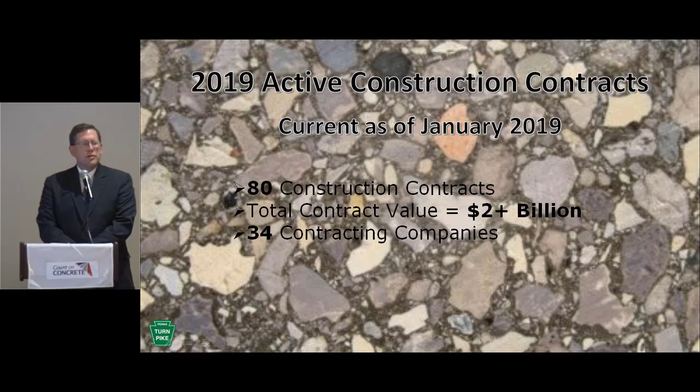Currently in 2019, the Turnpike has a total of 80 construction contracts with a combined value of $2+ billion. We have 34 varied contracting companies working on those contracts. You can take a look at the capital plans for the Turnpike, and historically in 2016 we were at $660 million. As you look through that list in the years, you'll see at 2019, currently we are at a value of

$543.7 million for our capital plan. We are anticipating to bid in calendar year 2019 $574.8 million in contracts. Part of that addition or overage from what the capital plan would be, our independently funded programs would be part of that process as well at $186 million.

The highway program itself is represented by a value of $463 million, with our facilities unit utilizing $43 million of that.

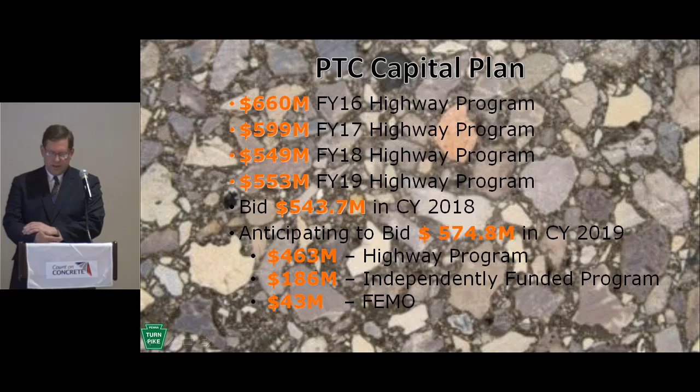Here you can see a bar chart of our capital plan, and you'll see currently as it begins with 2019 and extends out 9 years, we have a bit of a dip around 2021, 2022. Some of that is in relationship to Act 44, which is scheduled to sunset in 2022. That represents the $450 million payments that the Turnpike makes annually to PennDOT, utilized in the Pittsburgh and Philadelphia areas for mass transit.

Representatives of the Turnpike have been working with those agencies and with our leaders in state government, finding alternative sources for that income once the resources and the flow of money ceases from the Turnpike.

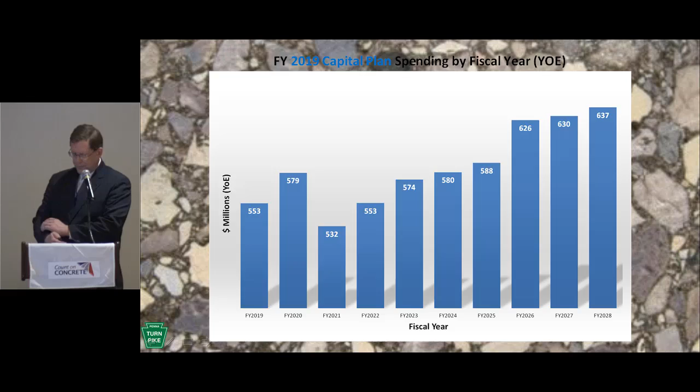Again, this is a similar chart showing the proportions of the highway plan in relationship to the capital plan. And again, you'll see there's just a slight dip around 2021 and 2022, and then we continue to climb once again.

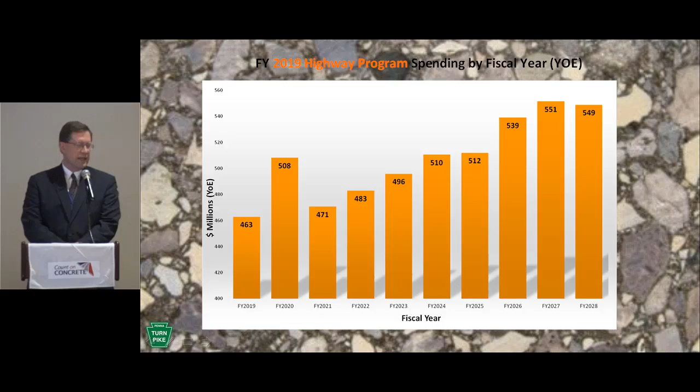This chart will give you an overview of the percentages of what represents our total capital plan. You can see our highways are the largest portion at 78.5%, with our facilities following at 7.8%, with fleet management, technology, cashless tolling, and our broadband initiatives making up the balance of our capital plan.

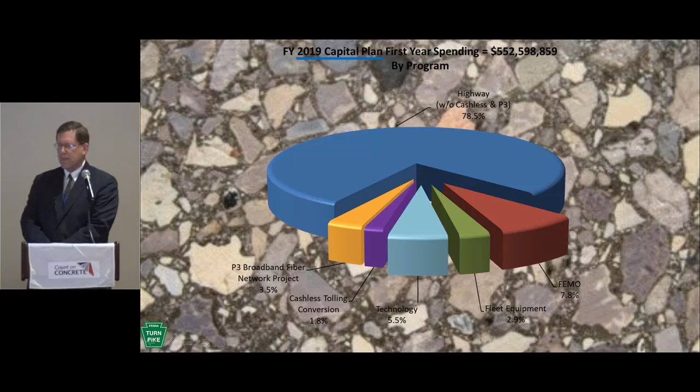The highway program itself is made up of total reconstruction being the largest piece in that pie. Our total reconstruction projects, I'm sure if you travel the Turnpike you've noted those, are multi-year. They're at 36.8%. We have roadway safety following closely behind at 27.4%.

And then bridges and tunnels and our structures at 11.1%. Our interchanges follow at 10%. And then highway miscellaneous expenses, cashless tolling, and our broadband networks make up the balance of our highway program.

Some of you may have heard of Turnpike 576 that is being constructed at this point in time. It is south of Pittsburgh from State Route 22, and will connect east to Interstate 79. This is a picture of the 9 sections or contracts that represent that corridor, starting with 55A1 as it intersects with Route 22 and moves across to the east to Interstate 79.

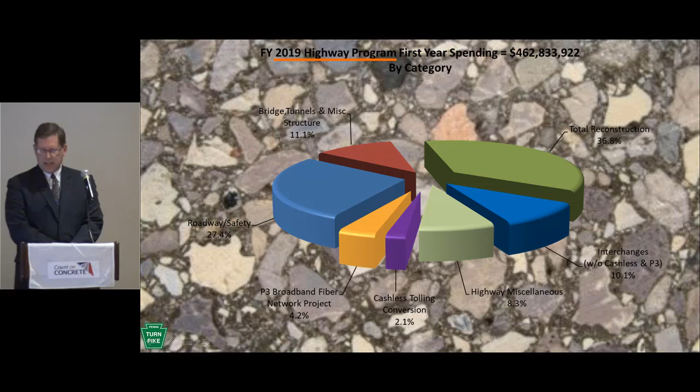Some of the highlights of the Southern Beltway are that we have 13 miles of mainline roadway. We have 2 cashless tolling gantries that will be installed east and westbound. We have 7 pairs of mainline bridges, 5 local bridges. There are 4 bridges on the Interstate 79 tie-in alone. There is over 25 million cubic yards of excavation required to complete the project.

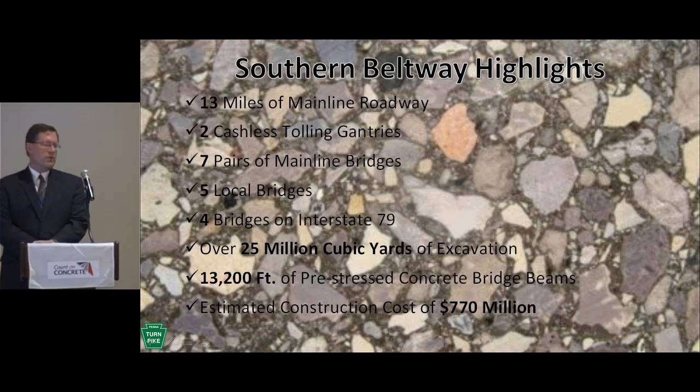We have 13,200 feet of pre-stressed concrete bridge beams for an estimated total cost of $770 million. We are fortunate to have 9 prime contractors on our Southern Beltway corridor.

Contracts that have been completed so far, first is Mosites. They started an early action contract constructing 2 flyover bridges at State Route 22. The contract value was $14.4 million and was completed in 2015.

That was followed by our Section 55W, which amounted to a wetland mitigation project done by Cast & Baker. That had a contract value of $954,000 and was completed in December of 2016.

Next to be completed just this past year was our Section 55 ABC held by Golden Triangle at a price of $4.7 million, which amounted to the cashless tolling component installed on our Findlay connector.

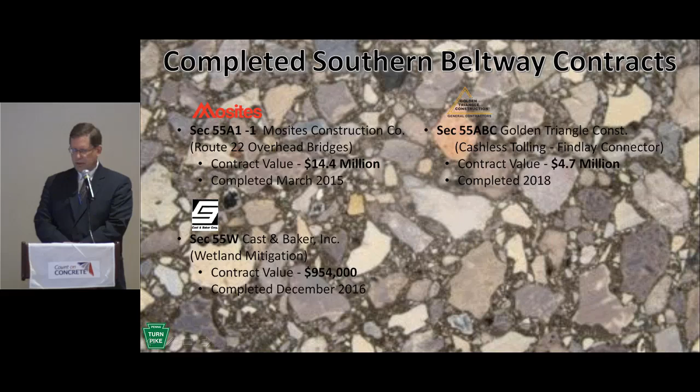We have 2 contracts yet to bid in 2019 for the corridor of the Southern Beltway. Section 55S was actually bid on February 13th, but has yet to be awarded. And pending next month in March will be 55M, for the construction of a maintenance facility for this section of roadway, with various components involved in it.

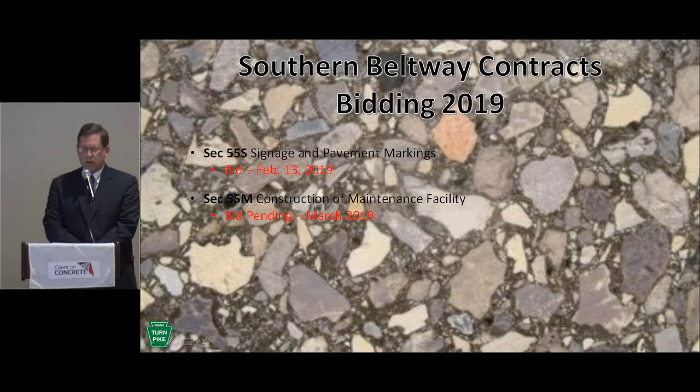The Southern Beltway contracts that are under construction, starting at Route 22 and heading east to 79: first is Section 55A1, held by Independence Excavating at a contract value of $96.3 million, currently at 88% completion. That's followed by Trumbull Corporation with Section 55A2, a contract value of $116.1 million, 4% complete.

Next we have Section 55B, handled by Joseph B. Fay Company, with a contract value of $96.4 million, 77% completed. Beaver follows with Section 55C1-1 at $87 million, 49% complete.

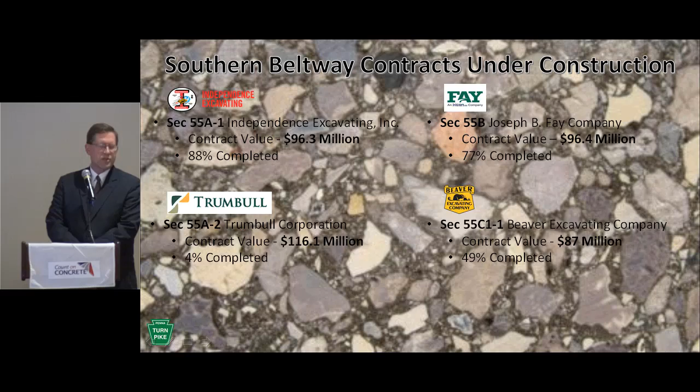Trumbull again is followed with Section 55C1-2 at a contract value of $37.7 million and is 41% complete currently. Walsh

Corporation has taken Section 55C2-1. It's the largest section on the Southern Beltway corridor. It represents the tie-in with Interstate 79 at $174.3 million, and they received notice to proceed on February 4th of this year.

Independence Excavating has Section 55C2-2 for a contract value of $23.6 million and is 16% complete.

Section 55T, which represents signage and cashless tolling, with a contract value of $4 million, and they will be installing the cashless tolling gantries on the Southern Beltway project, and they have yet to complete anything on that contract. This whole corridor will be open to traffic in the year 2022.

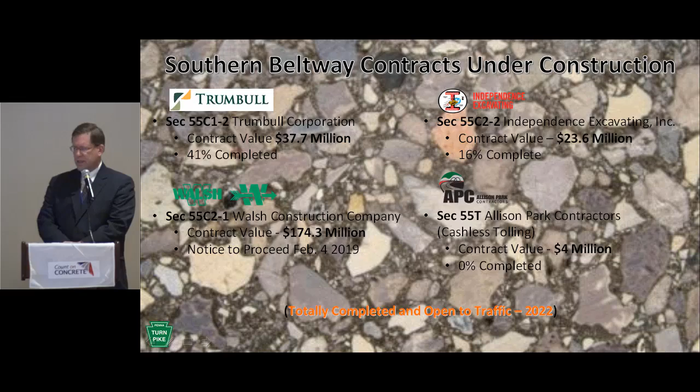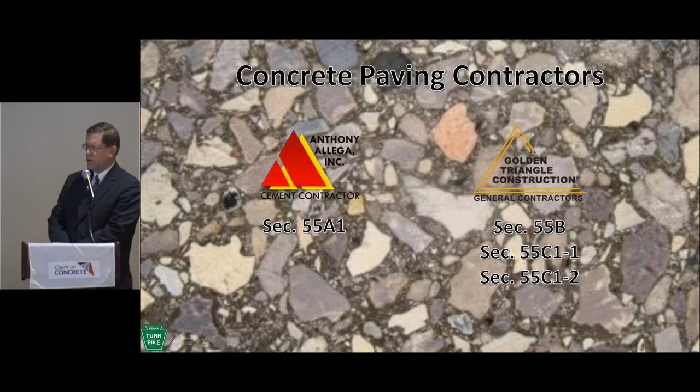Currently, we have 2 paving contractors working on the Southern Beltway project. Section 55A1, we have the Anthony Allega Cement Contracting, and we have Golden Triangle Construction, who has begun their process of paving on Section 55B late this past fall. They will then this spring be working to move forward to Section 55C1-1 and Section 55C1-2. The main line roadway consists of 6 inches of 2A subbase.

We see sections that are being bid with limestone. We have other sections that are also being bid with air-cooled blast furnace slag. That's followed by 4 inches of asphalt-treated permeable base or cement-treated permeable base course. The travel lanes are 12 inches in depth, and that's LLCP. We have a left lane width of 12 feet, and the right lane is a 14-foot width with a 2-foot effective shoulder.

There's a 2% cross slope with a mounded median is the design. The shoulders are 10 feet in width, variable depth LLCP. On the right, the left shoulder is 4 foot variable depth LLCP.

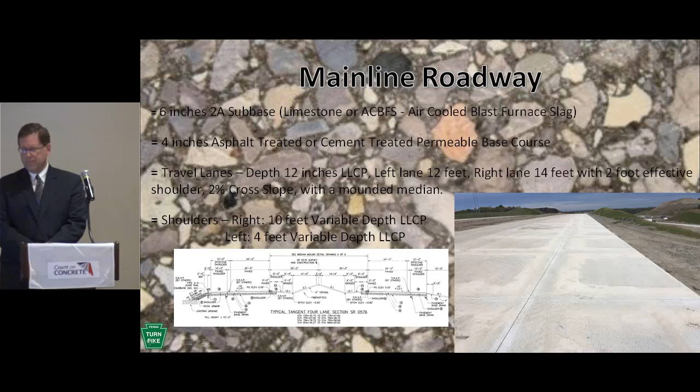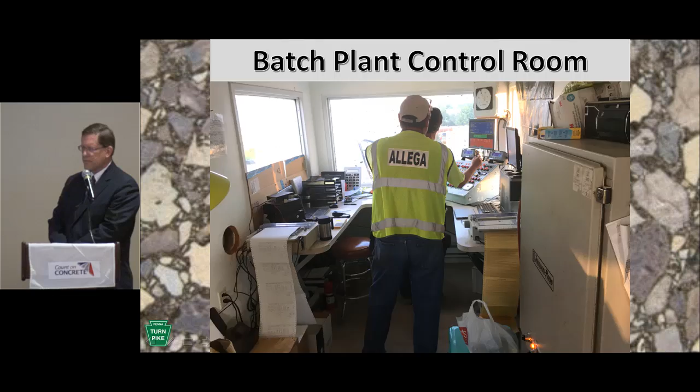This picture shows them working at producing and shipping LLCP. There you can see a triaxle being loaded with the mixture. For the most part, triaxles were utilized on this section of the project to transport the LLCP to the paver. There were, I think, 3 agitator trucks used as well by Allega.

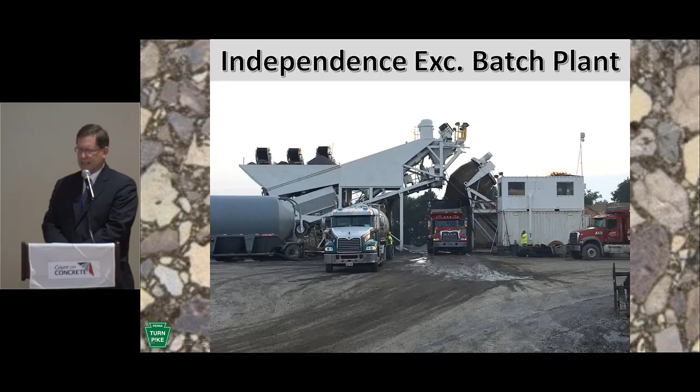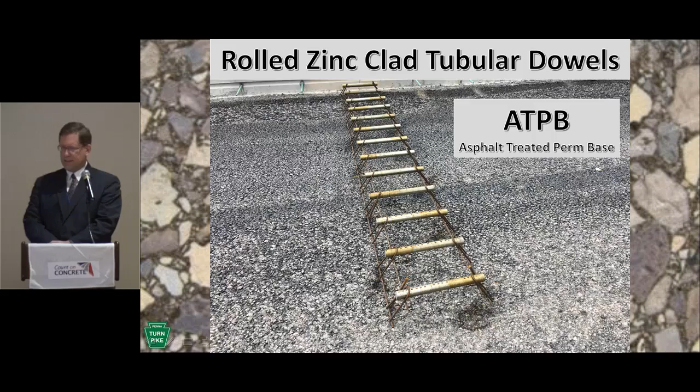This is the application of the Tectyl 506 lubricant, the bond breaker that's being applied prior to the paving process. To give you a look at the preparation that's been done prior to paving, you can see the baskets and dowels are securely anchored to the asphalt-treated perm base.

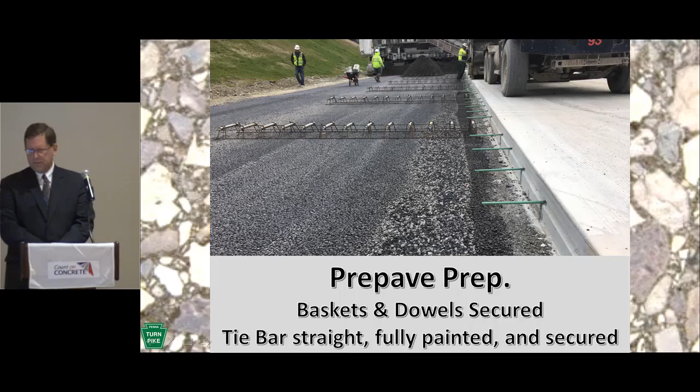The tie bars are straight, fully painted, and have been installed into the keyway. Again, you get an idea for the 12-inch slab, the roadway, the tie bars as they're installed at a 30-inch on-center spacing.

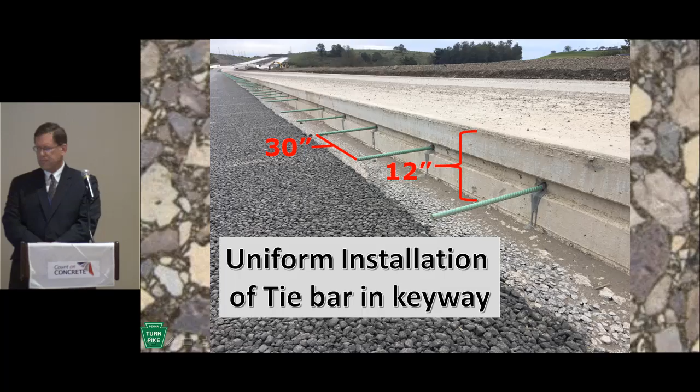Again, just another shot of the concrete placement process. This gives you a look at the finishing from once the paver is moving forward in the paving process.

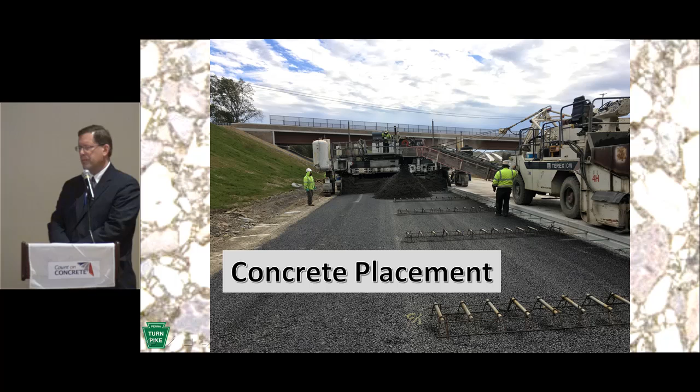Here they're doing some testing. They're going to slump their airs, making their compression cylinders. Also, samples were lifted as required for water cement ratio verification as they're performing AASHTO T318 at various intervals.

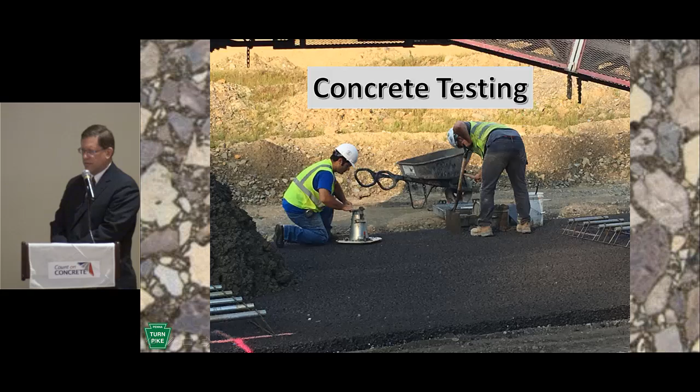Here with the 10-foot level or straight edge and the smart level, they are checking for cross slope.

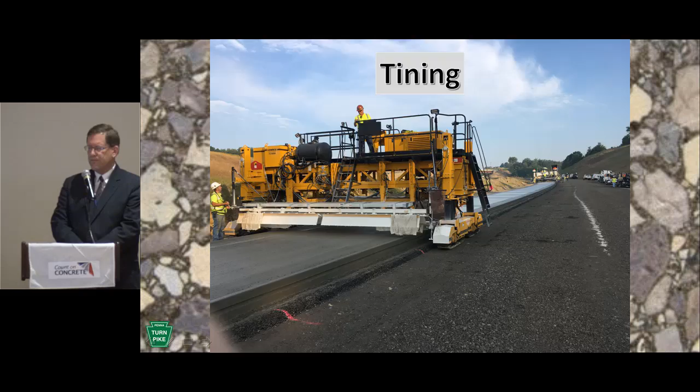Longitudinal tining is specified in this project, and there you get a close-up look at the burlap drag and the longitudinal tining as it's taking place.

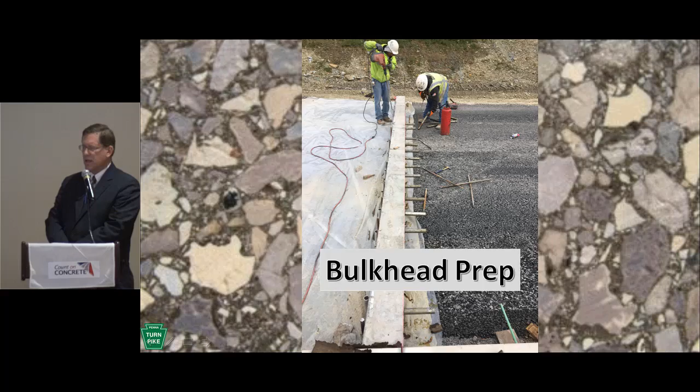Bulkhead prep at the end of the day, you can see that's taking place in this shot, and once the form is removed, the bulkhead butt joint as they will begin the next day's paving.

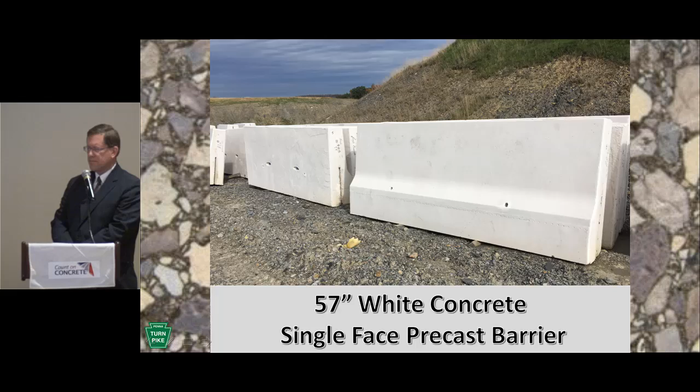Something we do a little different, we utilize white concrete single-face precast barrier. They're 57 inches in height. We place this white barrier on the approaches, on our bridge approaches, to catch the traveling public's attention, to let them know that they are transitioning from the roadway onto a structure. We find the white concrete and its added reflectivity plays a key role in this function.

We use the white concrete for not only our precast barrier, but also the slab-mounted barrier, as well as the parapet on our bridge structures.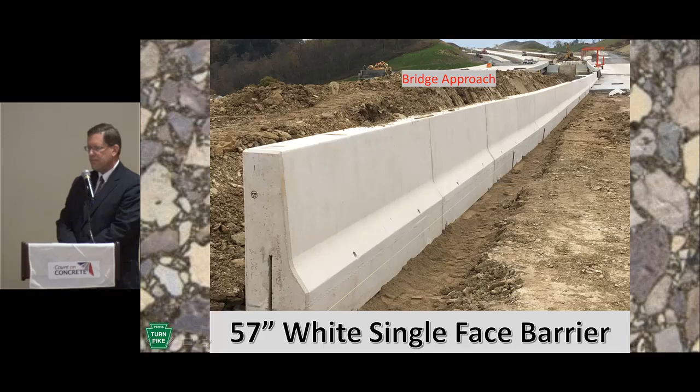We have made quite a bit of progress. If you were on the bus tour back in August, we crossed that 22 bridge and the paving train was immediately on the other side. So you can see quite a bit of progress has been made despite the inclement, wet, and rainy weather of 2018.

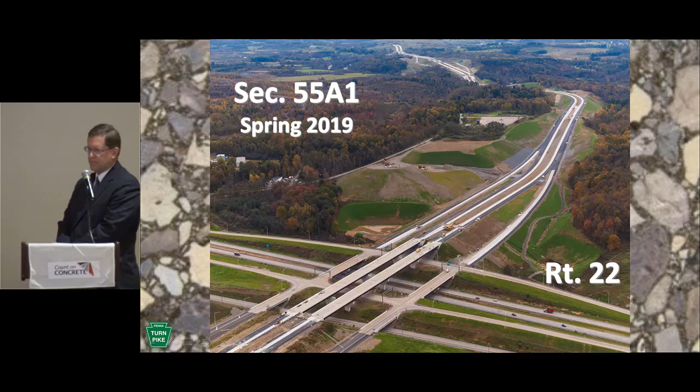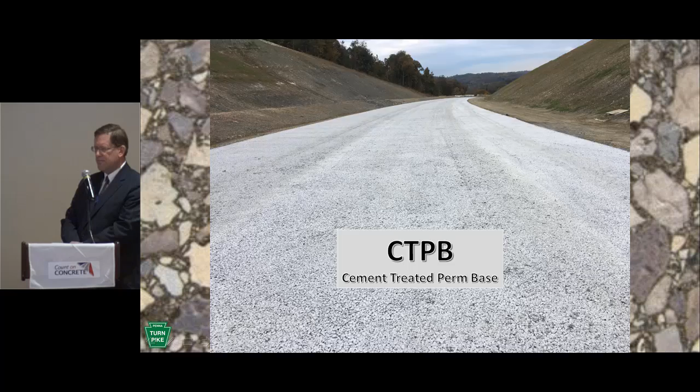This is a shot of Golden Triangle's portable plant with Section 55B. They opted to use cement-treated perm base. This was a day that they were paving, and note that there are no dowels or baskets in the picture. Golden Triangle uses a dowel and tie bar inserter in their paving process, therefore eliminating the need for baskets.

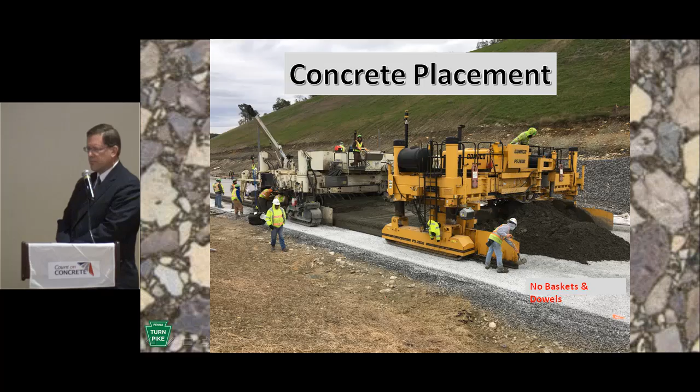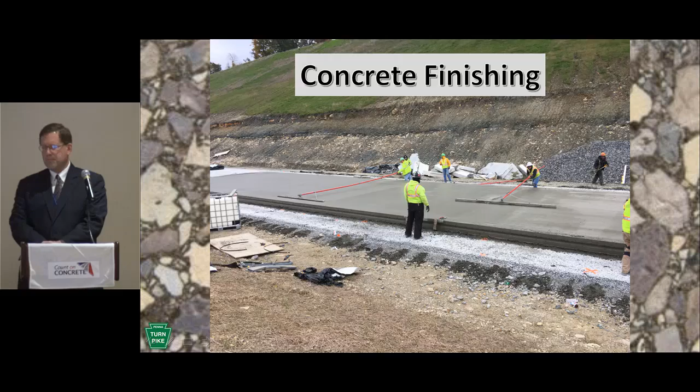Again, concrete cylinders being made, testing of airs and slumps taking place. Here you'll see the straight edging operations taking place and some finishing, and a shot of currently where we'll be picking up in the spring of 2019.

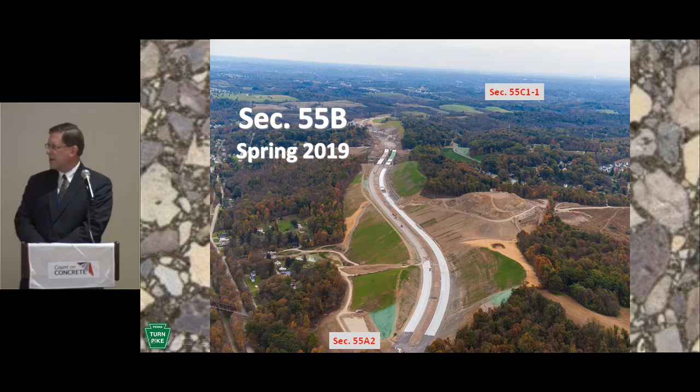As I stated earlier, if you were on the bus tour this past summer in 2018, we had the opportunity to see firsthand the progress being made on Section 55A1 and Section 55B. This is a shot as we were up on top at Section 55B.

We also had the opportunity to see some paving on 376 by the airport and look at Golden Triangle's portable plant there, see the Super Air Meter being demonstrated and some other new technology, which was very beneficial.

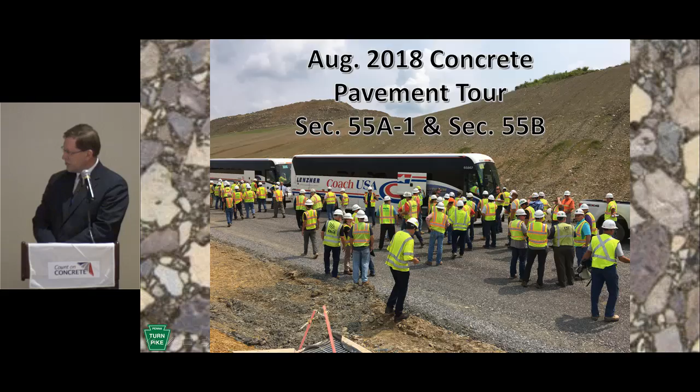Part of the long life concept is the component of just-in-time training. What that does is basically try to get all the players in the room -- Turnpike representatives, consultants, subcontractors, anyone involved with the LLCP placement process -- together to review LLCP concepts and best practices, familiarize everyone with the specifications, and get everybody on board as to how we implement quality control, and if there are issues, who's contacted, when, why, and how we correct the issues.

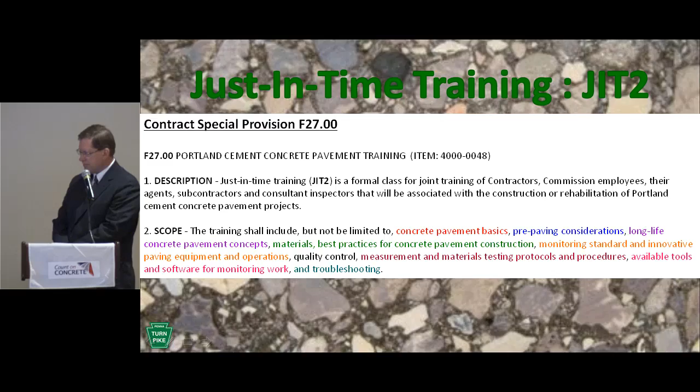This is a picture of the just-in-time training that was held at the Quicksilver Country Club's facility prior to the placement of LLCP paving on 55A1. The facilitators or presenters were John Becker and Rich Jucha, who did a fantastic job fostering and presenting information, and fostering questions and dialogue between the various parties in the room.

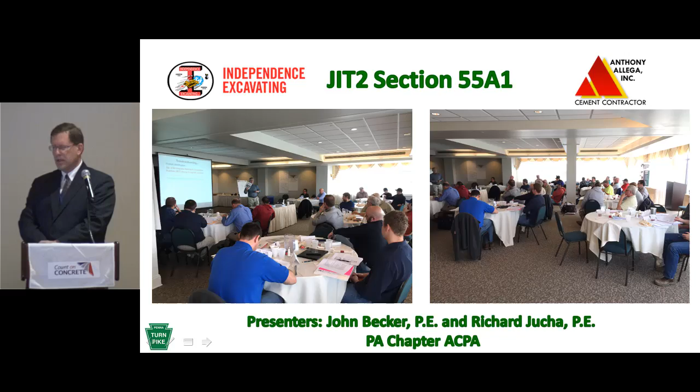Some of the challenges we have seen with implementation of the long life concrete pavement specification -- which for the Turnpike is a special provision F34 in our contracts -- is the sample point for the AASHTO T318 microwave testing, which is used as verification of the water cement ratio at the point of placement.

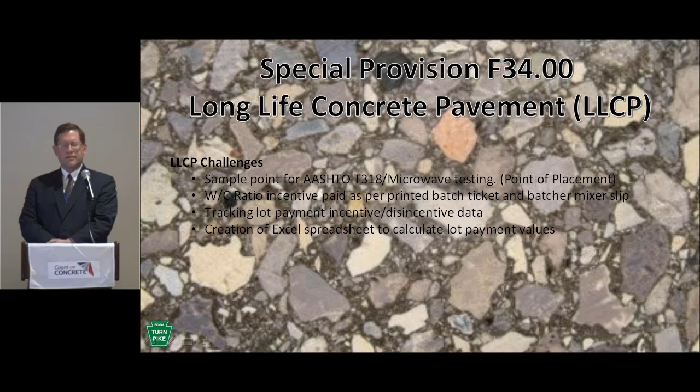The water cement ratio incentive is paid per printed batch ticket and batch mixer slips, tracking lot payment incentive and disincentive data. We've worked on creating an Excel spreadsheet to calculate lot payment values.

Just a quick overview of our special provision F34 in section 501(3)(v). It states that concrete must be placed with a water cement ratio of 0.37 to 0.42 in order to achieve incentive. The representative is responsible for calculating and determining the water cement ratio for the sublots and lots being placed. The cementitious content is taken from and calculated via the batch tickets and delivery tickets.

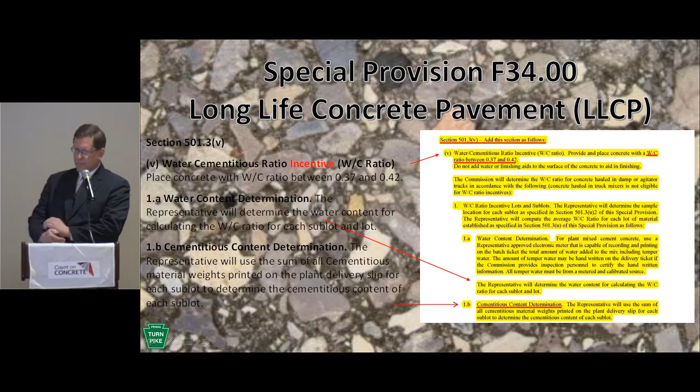As you can see, you have a batch ticket and your batch mixer slip. It's imperative that when these values are calculated for water cement ratio, you're using the correct batch mixer slip. We calculate these a minimum of every three hours, sometimes more frequently, maybe on a two-hour basis or as needed.

It's imperative that we use the correct free water from the aggregates in conjunction with the weights noted on our delivery tickets so that we get the correct water cement ratio calculated.

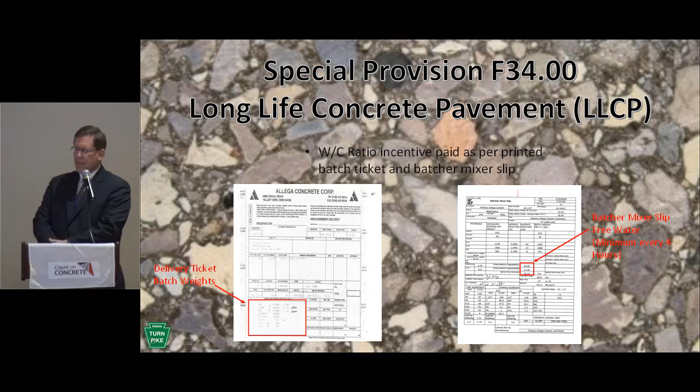What this has meant is we developed a spreadsheet to calculate the batch mixer slip data along with delivery ticket data. We went through and verified that the values were correct and the correct amount of free water was being used to calculate the water cement ratio.

When we compared the actual water cement ratio per those printed weights against the AASHTO T318 microwave test water cement ratio values, we found that 29% of the lots matched up spot on -- they were the same. However, 46% of the lots were higher, meaning the 318 testing data showed a higher water cement ratio than what was actually batched, with 25% of the lots being lower for the LLCP placed on Section 55A1.

Throughout that process, we have come to question whether the sample point for the T318 testing should actually be at the concrete plant.

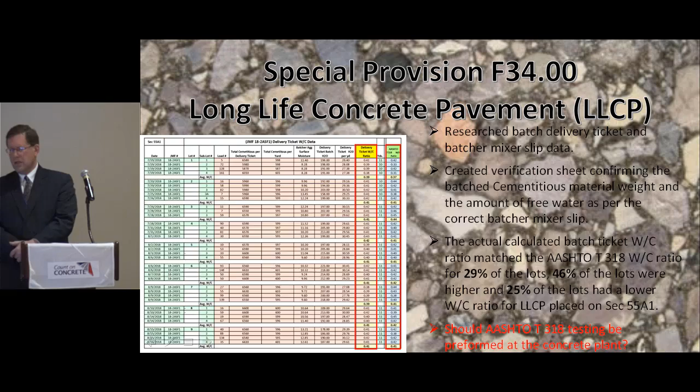We are of the opinion we're paying on the actual printed ticket data at the point of loading. We're of the mindset at this point that if the concrete tech at the plant was actually doing the sampling for the microwave verification testing, it would eliminate some of the variability of different personnel and inspection staff sampling out at point of placement.

It would also take out the variability that as the paving train moves farther away from the batching operations of getting that sample back to the concrete lab, as you have 45 minutes from the time the water contacts cement to begin that testing protocol, that hurdle would be eliminated. We feel that a lot of the variability with testing at point of placement could be eliminated, thus maybe increasing the correlation between the AASHTO T318 water cement ratio values in conjunction with the actual batch tickets.

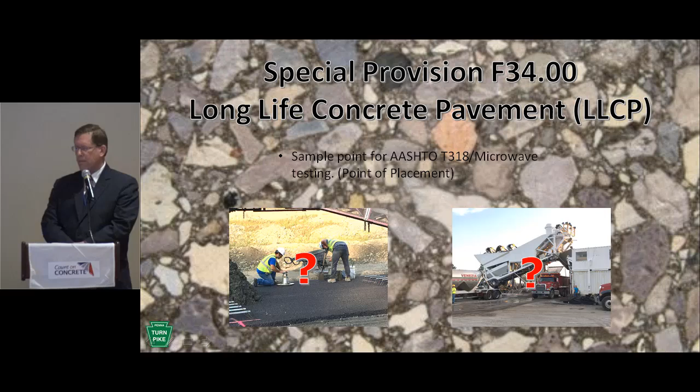Data for calculating the lot payment water cement ratio we found, after this first year of paving, was a challenge. In order to calculate the lot payment for the LLCP, you have to track the compressive strength of your lots and sublots. You have to consider the depth of your paving, and also then, of course, the water cement ratio needs to be tracked and calculated.

We found that our resources were somewhat limited in collecting that data in one place, and also being able to log that data for the entire section or contract. We felt that was imperative. So we are working on an Excel spreadsheet that will calculate single lot payments, also the incentive payments, should there be, for each lot and sublot for the entire contract.

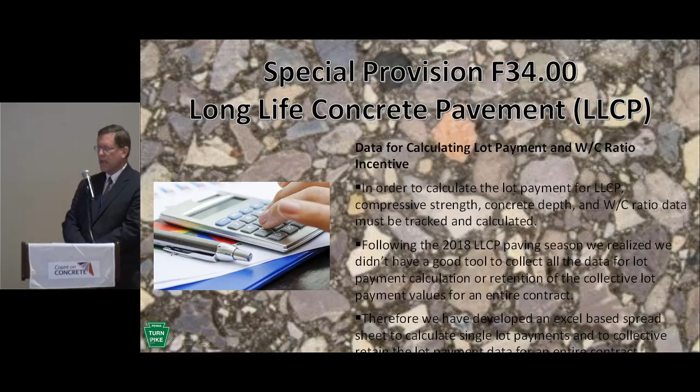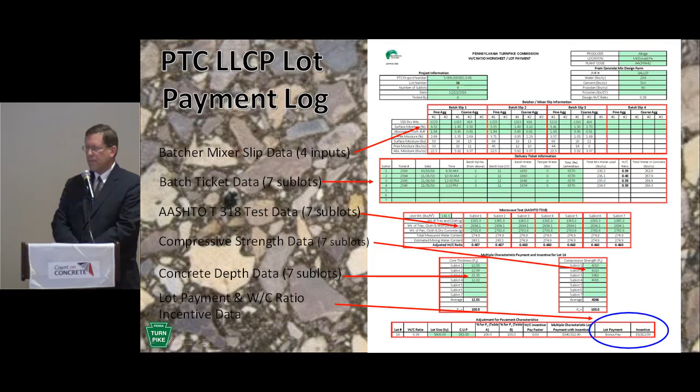Another incentive that can be earned on our contract is concrete pavement ride and quality. That incentive is our special provision F28. It notes that if a lot is not subject to any corrective action, you follow Schedule U of Table A with the IRI numbers. And if there is corrective action deemed necessary for the lot, once that action has been taken care of or completed, you run the IRI and you follow Schedule C.

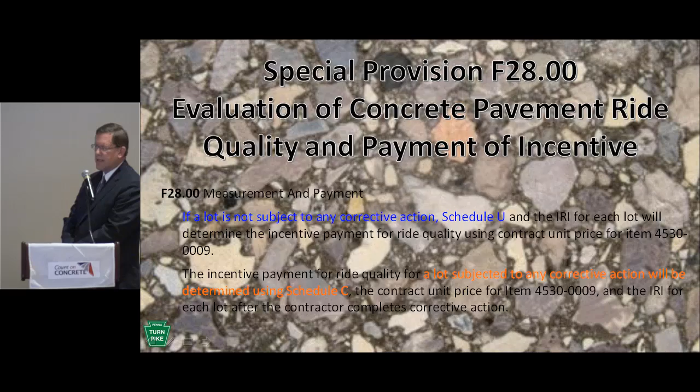There's a picture of Table A. You can earn as much as 8% in incentive if you do not need to take any corrective action for ride quality, and if you have been mandated to take corrective action, you can still earn as much as a 5% incentive for ride quality.

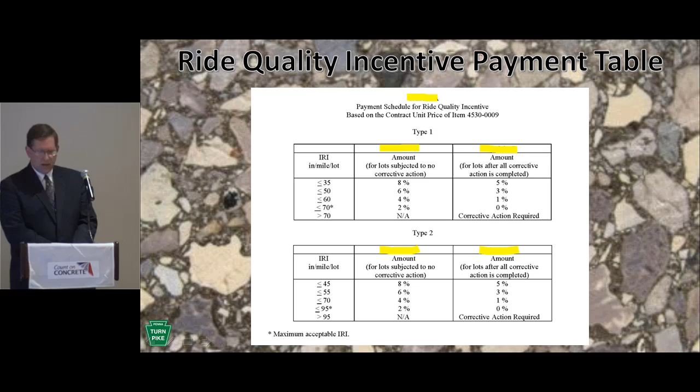Are there any questions?

I want to thank John Becker and Rich Uhal for their support, as they are valuable resources not only for this industry but also for the agencies as they go back and forth with suggestions and as we see problems arise from time to time. Also a special thanks to our partners at PennDOT.

Neil Fannin has been excellent to work with. I spoke with him a couple weeks ago at Penn State as we discussed some of the issues with long life concrete paving. In his words, it's a learning curve, and through the process of actually utilizing these specifications, we'll continue to refine them to a point where the agencies, both PennDOT and the Turnpike, are able to achieve the quality levels they're looking for, but also remaining achievable to the contractors so they can acquire those incentives as well.

Garth Breidenball has also offered insight as we've been working with this process. And Kevin Nagy has also been in contact with us and had some conversation concerning what he has seen on the completion of Route 219 in District 9 in southern Somerset County, as it had a couple components of long life concrete as well. And again, we certainly appreciate the dialogue between these persons and PennDOT as we all seek to improve the quality of our roadways. Thank you very much.